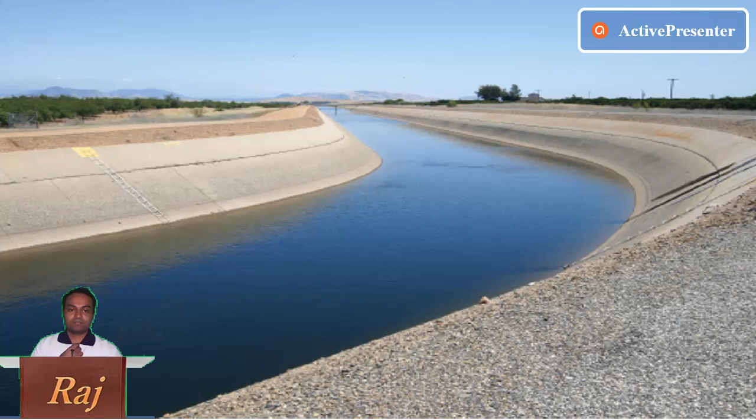Now we are going to study about open channel flow. This is one part of fluid mechanics, and the name itself says that there will be a channel. Through the channel, flow will be taking place, usually water. The water is flowing through a channel, and the word 'open' means that the surface of the water is open to the atmosphere. Therefore, this is called open channel flow.

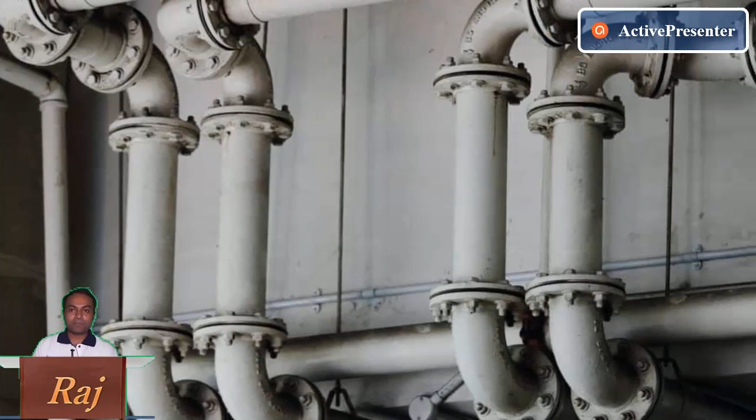The opposite to this is pipe flow, where the fluid is flowing through a pipe. There the fluid surface is not open to the atmosphere, and the fluid flows because of pressure only. But in open channel flow, the fluid flow takes place because of gravity.

How do we characterize a particular flow as open channel flow or pipe flow? Just observe the water surface. If the water surface is free to the atmosphere, then that is open channel flow. What are the examples of open channel flow? Irrigation canals, streams, rivers, navigation canals, drainage channels, sewer lines and sewers. These are all examples of open channel flow.

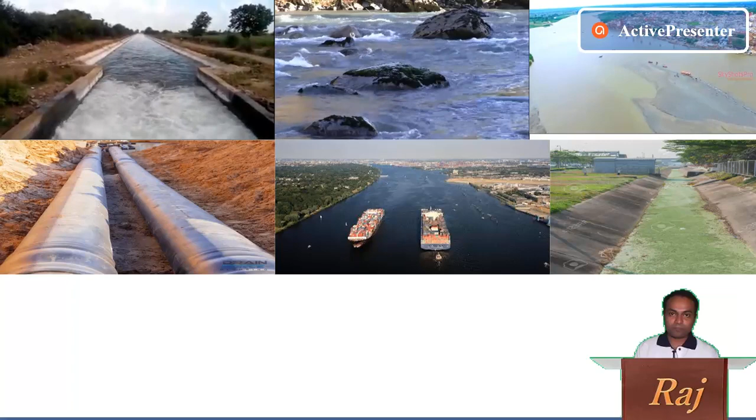Now, the flow in open channel flow is largely turbulent, therefore the surface tension will be neglected. In this entire chapter, surface tension is ignored, that is negligible, therefore ignored.

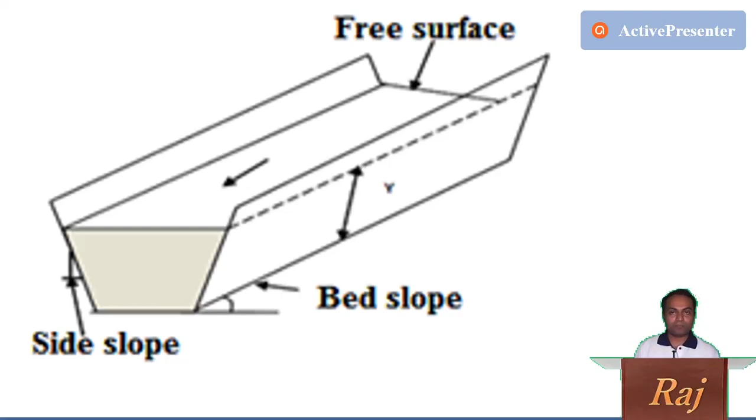All open channels have a bed slope, hence gravity flow is the main force causing the flow. The surface is subjected to the atmosphere, open to the atmosphere, meaning it is gravity that is dragging, pushing and pulling this water from one point to another. When gravity has to work on a particular flow, it should have a slope. Therefore, the bottom of the channel must be sloped in nature, so that gravity will attack the water and pull it downward. That is the main governing force for open channel flow: gravitational force.

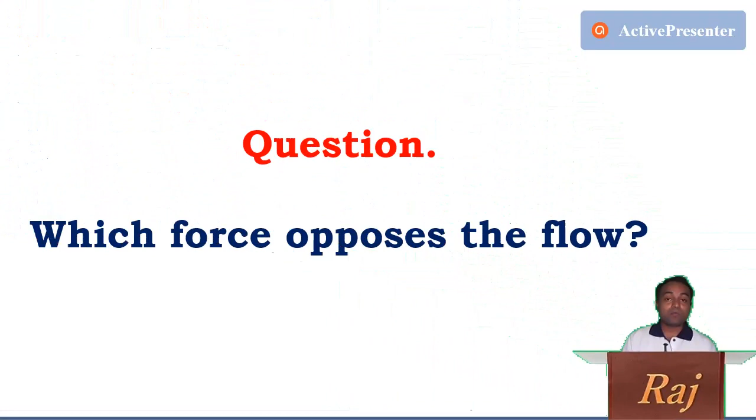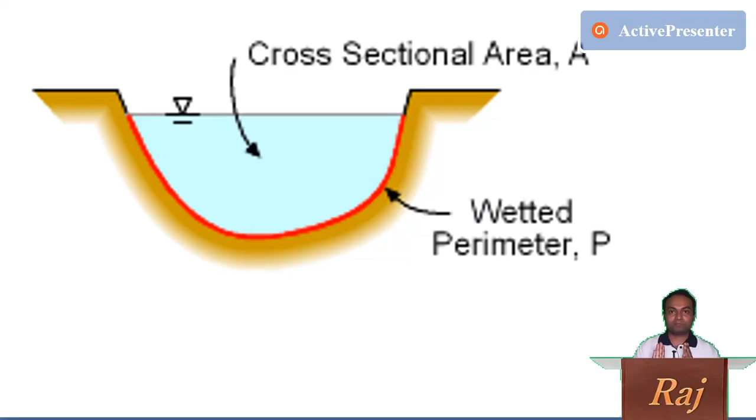Then what is the opposing force? What is the resistive force? Is there any resistive force to the flow? Yes, there is a resistive force, that is the channel perimeter. For example, if this is a rectangular channel, where the water is moving, the perimeter where that water is rubbing against it will offer some resistance. Therefore, gravitational force is the main driving force, and the resisting force is the surface force, that is the wetted perimeter, which offers some resistance.

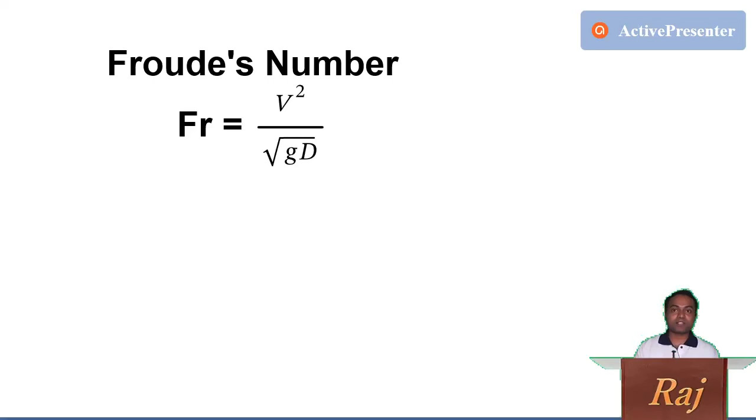As gravity is the driving force, Froude number is the main non-dimensional number we are going to use here. We have many numbers studied in the previous chapter: Froude number, Reynolds number, Euler's number, Mach number, and so on. These are non-dimensional numbers, but here the gravitational force is predominant, therefore we use Froude number. What about in pipe flow? In pipe flow, viscous force is present, therefore we use Reynolds number there. Here, we use Froude number.

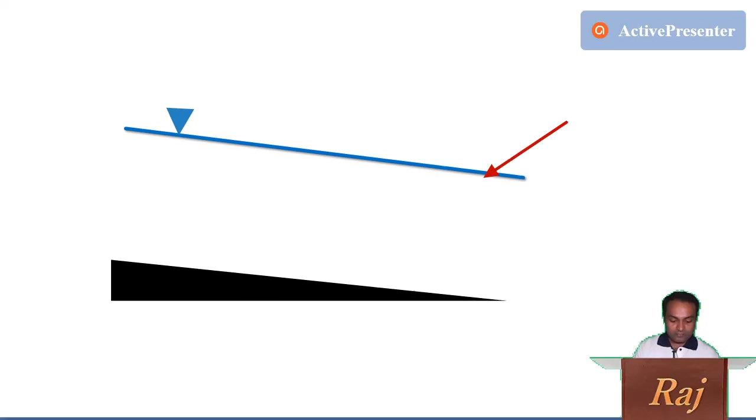The water surface represents the hydraulic gradient line if the slope of the channel is small. Let me draw this surface. Look here, if this is the slope, this is the bottom line and this is the flow of water. Then this line is the top surface of the flow, and that line itself is our HGL. We have two lines to represent the flow: one is the TEL and the second is the HGL.

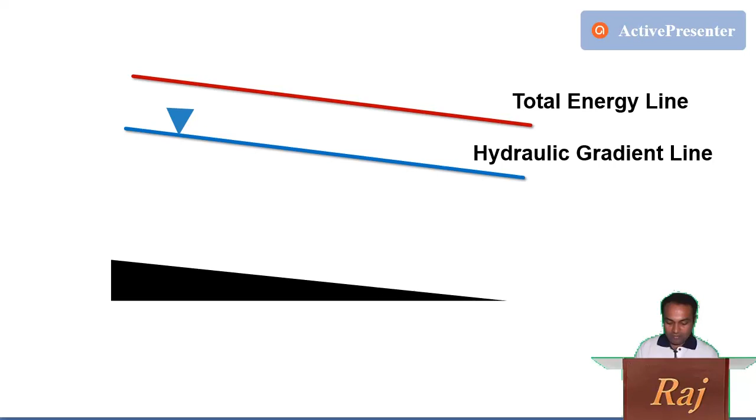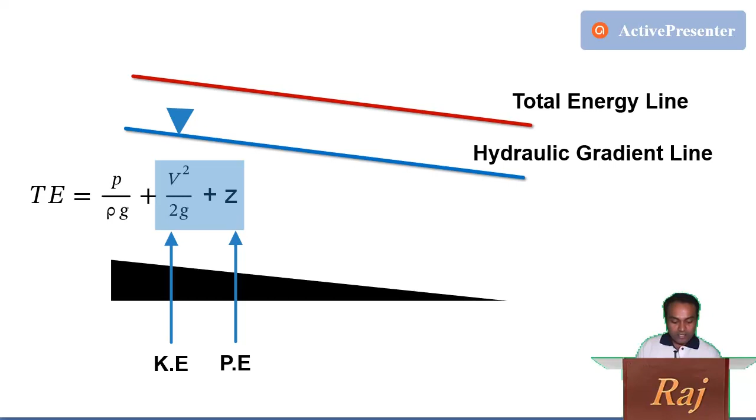We have Bernoulli's equation, that is total energy equals P by rho g plus V square by 2g plus Z. Here, P by rho g won't be there because this is gravitational flow and there is no pressure, therefore in this Bernoulli's equation, P by rho g will not be there. Then what is left? Energy equals V square by 2g plus Z, kinetic energy and potential energy both will be present here, pressure energy will not be there. Therefore, your HGL and the surface line are both the same here.

Now we will discuss the difference between pipe flow and open channel flow. Just remember, pipe flow is already thoroughly studied in the previous semester, so I am not going to teach you that again, but the difference between pipe flow and open channel flow.

In pipe flow, total energy means P by rho g plus V square by 2g plus Z, that is pressure energy, kinetic energy, and potential energy. All three energies added give the total energy in pipe flow. In open channel flow, pressure energy is not there, only V square by 2g and Z, meaning kinetic energy and potential energy. Only these two are there.

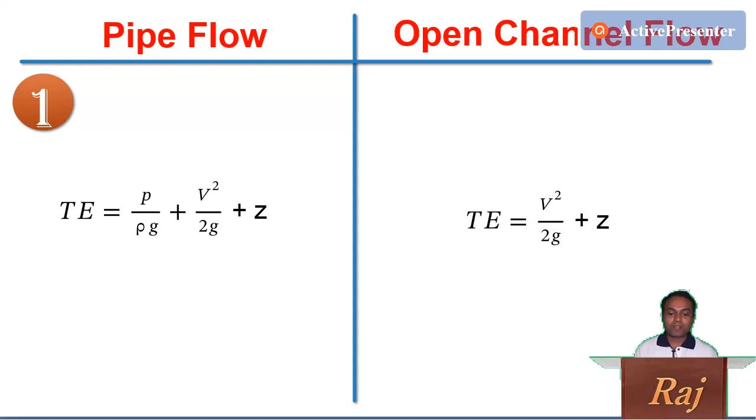When you come to the representation of flow, that is your TEL and HGL. In pipe flow, TEL and HGL are parallel to each other, but the HGL does not coincide with the surface of the water. But when you come to open channel flow, the surface itself acts as the HGL.

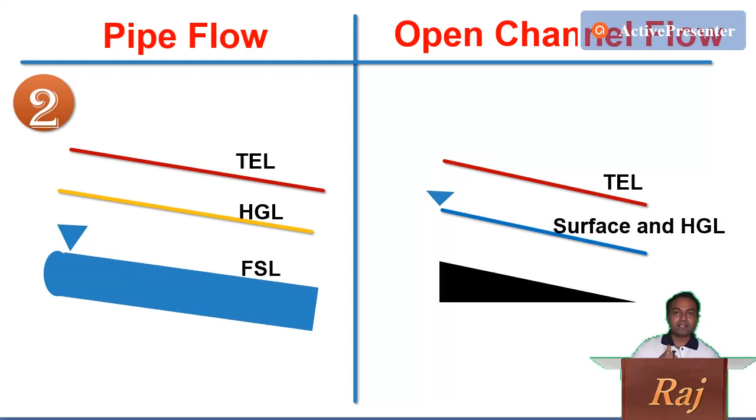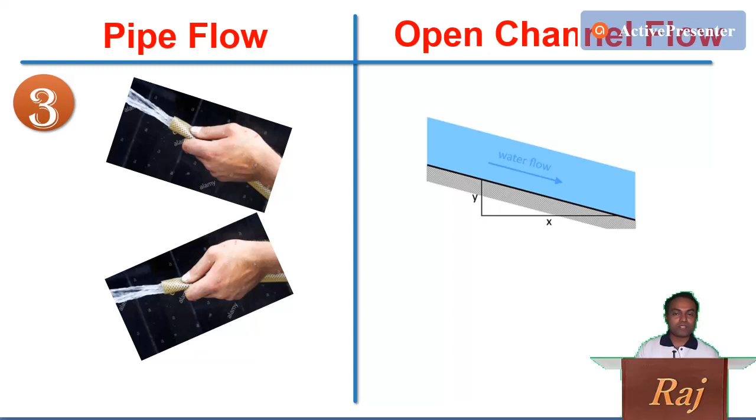Then the direction of the flow. In pipe flow, the pressure can be positive or negative, therefore the flow may be in the upward direction or downward direction. Both can happen in pipe flow. But when you come to open channel flow, here the flow is always downward because it is a gravitational flow.

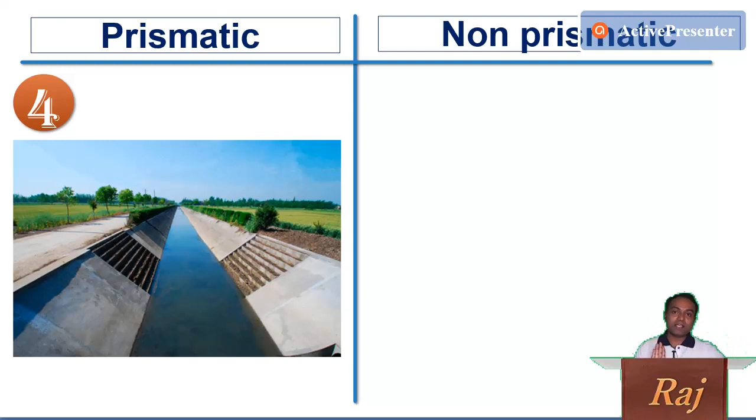Now, if you come across cross-sectional areas, before that you should know the meaning of prismatic and non-prismatic. Prismatic means if any channel has a cross-sectional area constant throughout the length, it is called a prismatic channel. If the cross-sectional area is not constant throughout the length, it is a non-prismatic channel.

The best example of a prismatic channel is canals, irrigation canals, or small gutters, where the cross-sectional area is kept constant for a particular length. But non-prismatic may be a river flow. When the river is there, you will not get the exact same cross-sectional area everywhere along the length, therefore that is non-prismatic.

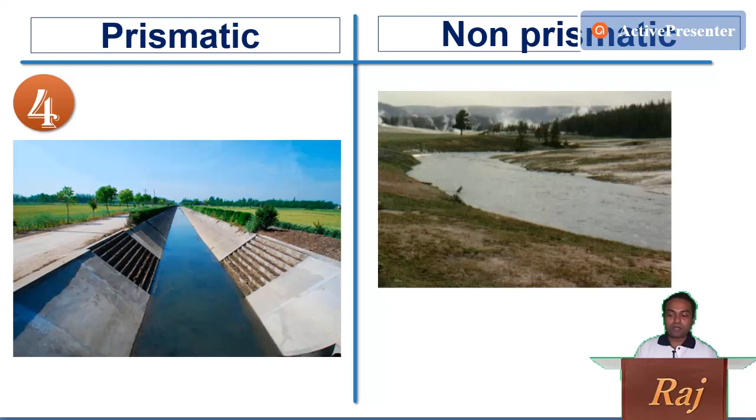Now, when I consider the shapes of the channel, in pipe flow we always prefer a circular diameter. That is, a pipe is always a circular diameter pipe we will consider. There are many reasons for that, and it is the only shape we consider in pipe flow.

But when you come to open channel flow, we will have many shapes. The basic ones are rectangular, trapezoidal, circular, semicircular, or triangular shapes. Sometimes you can derive your own shapes like an egg shape or a rectangle and semicircle combination, you can invent your own. But in this third chapter we will discuss four sections: rectangular, trapezoidal, triangular, and circular.

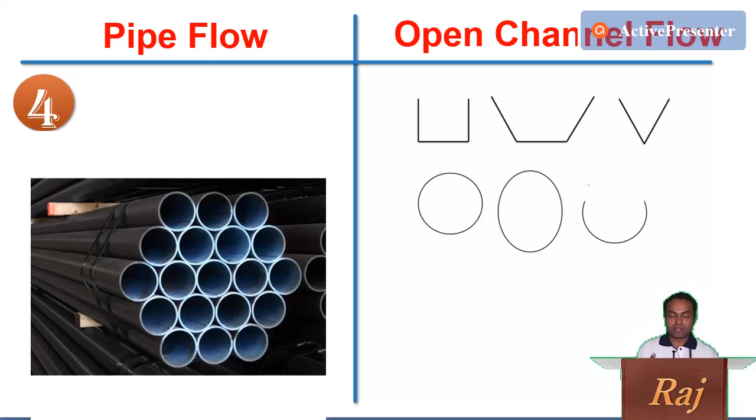Surface roughness variation: when dealing with pipe flow, the pipes are manufactured, meaning the roughness of the pipe inside is under your control. If you want it smooth, you order brass pipes or steel pipes. Like that you can order your preferences in pipe flow.

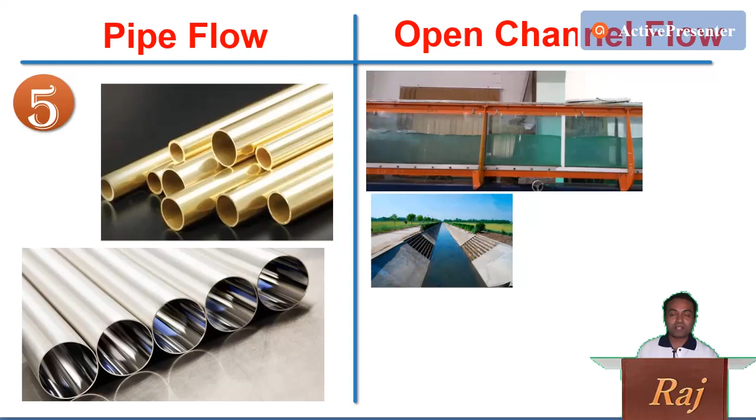But when you come to open channel flow, there are large variations. For example, in the labs, you may make channels with glass, so there will be a smooth surface. When you come to the field, the canals may be made of concrete, so you get a rough surface. If you study rivers, they are completely undulated and rough.

Therefore the variation of roughness in open channel flow is large, but in pipe flow it is somewhat predictable. Next, the dimensionless number you already know: in pipe flow we deal with the Reynolds number, and in open channel flow we deal with the Froude number.

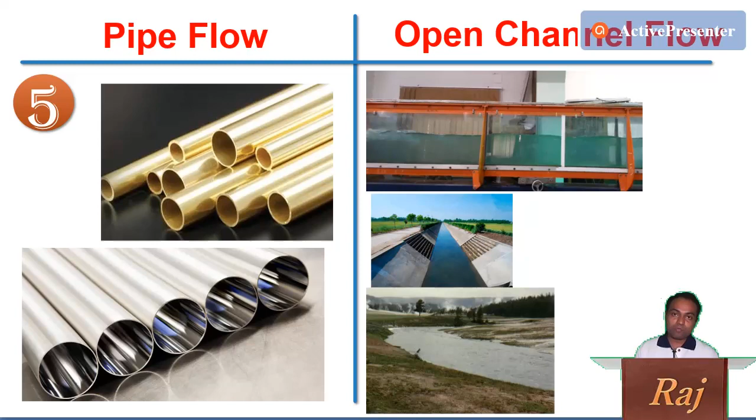Now coming to velocity distribution. Velocity distribution in a pipe is symmetric about the pipe axis, because at the surface where water touches the pipe wall, the velocity will be zero. As it moves toward the center, the velocity increases and becomes maximum at the center, then again becomes zero at the opposite surface. Therefore it is symmetric about the central axis.

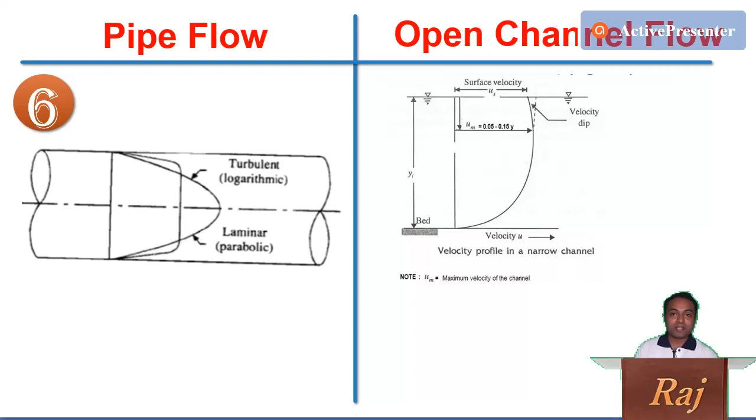But when you come to open channel flow, at the bottom velocity is zero, but the velocity is not maximum at the top surface. It will be maximum nearly 0.05 times the depth from the top, or 0.15 times the depth - there you may get the maximum velocity. The reason the maximum velocity occurs just below the surface rather than at the surface itself, I will discuss later. These are all the differences between pipe flow and open channel flow.